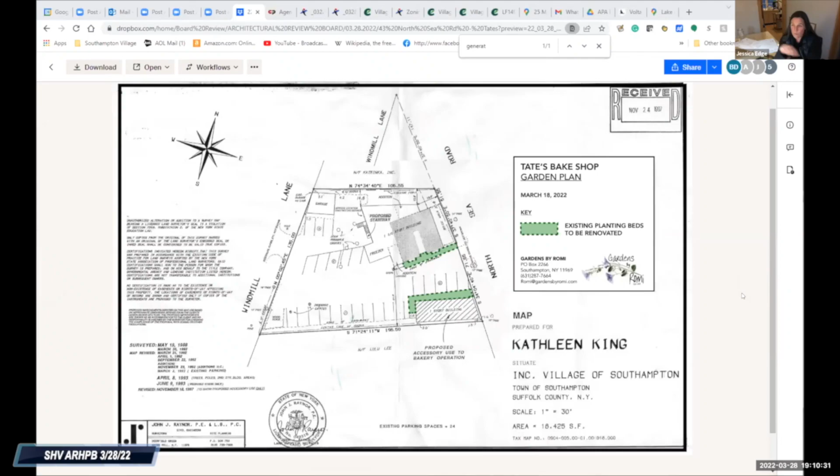So basically, we're not talking about a huge change, we're not changing the configuration of anything. We're using the existing beds that are there. A lot of the plant material is currently overgrown, and really some of it is just too mature for the size of the beds. Those are the 2 beds - pretty much the one that runs along the side of the actual shop, and then on the opposite side of the parking, in front of their storage building.

It's more descriptive in the rest of the presentation, because the plan doesn't show everything. So this is the first bed in front, and there's a lot of existing forsythia, and there's the boxwood. We want to keep the boxwood and the structure of that sort of English garden formality, but we really want to reduce the size of a lot of that plant material and put in more scale-appropriate plant material.

And really create a nice cottage garden. So the next slide will show what we're proposing - keeping the boxwoods, anchoring the corners, getting in some really robust roses, some beautiful climbers on the sign, and then some real cottage perennials that will follow through the season with big blooms like dahlias - a lot more color and interest than what's currently happening there.

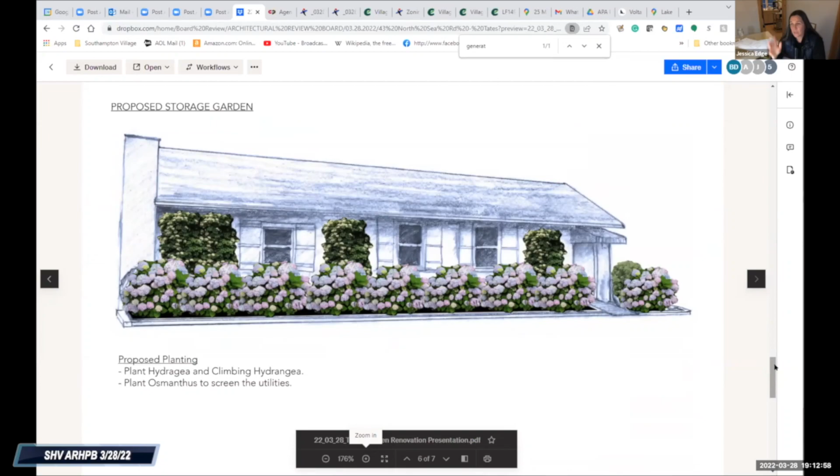What we'd like to do is reuse some of the hydrangeas that are in there, and possibly some of the boxwood - some of them are in good shape, some not so great. But most of it would just come out, and then do a really clean row of hydrangeas, maybe climbing hydrangeas on the building. On the side, we'd do a couple of osmanthus evergreens to screen the utilities on the side of the building.

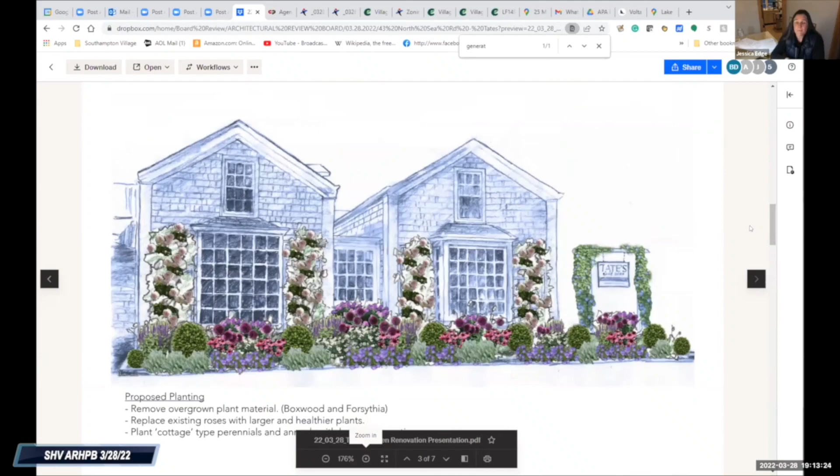And then add some seasonals for interest, and that's kind of it. It's really just to clean it up and create much more of a charming thing than what's there now. That's great, thank you, Jessica.

I'll ask the board members, do you have any comments? Looks beautiful, yep, it's fine to me. All right, Mark, you good? I'm good - we had already approved the front door and the architecture for this, was this additional, or is it all in the same approval? It'll be all part of the same written decision, so the vote tonight would be to close the written decision.

Okay, so unless there's any public comment - Kat, nobody in, no hands up. Okay, I move that we accept, well, that we move this to written decision for Tate's Bake Shop. Second. Okay, all in favor? Aye. Okay, thank you, Jessica.

That was easy. Yep, no problem, we get that all the time.

I move that we accept the applicant's request. A second, please. Second by Sarah, all in favor? Aye. Great, okay, so that's a standing adjournment pending the ZBA approval.

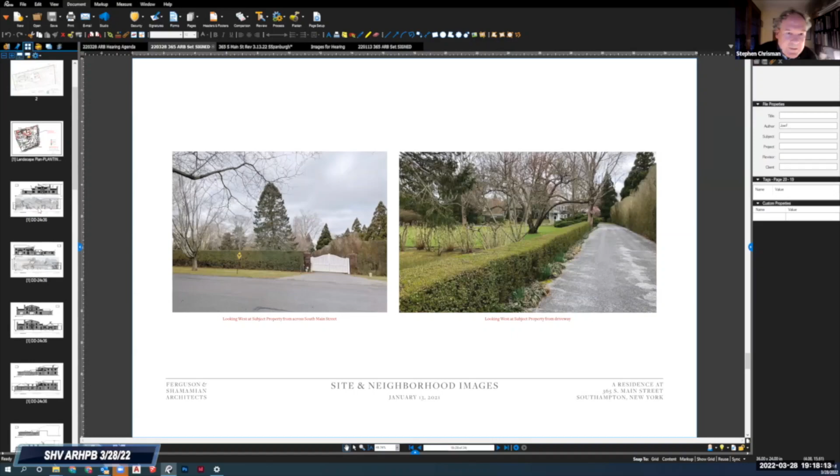Let's start to look at our revised elevations. I'd like to point out the updates that we've made to our drawings following Ms. Spanberg's report. Number one, the roof shingles, we've confirmed that the existing shingles are asphalt, so we'd like to replace those with wood shingles. Two, we've added back a window on the first floor, to the right of the front door, as a subtle asymmetrical architectural character of the existing building. And number three, we've changed the exposed base of the building to be parged masonry, which matches the existing.

And as I noted before, our intent is to bring back the east facade to a more historically correct version of the time period that relates better to the more historical facades on the rear and the sides of the building. We propose to do this in the following manner.

I'll start at the top. We'd like to remove the existing skylight that's over the center front door and replace it with an elliptical eyebrow dormer that alludes to the elliptical eyebrow fan lights on the rear of the building. Two, we'd like to remove two second floor windows near the center to create paired windows rather than more modern ribbon windows, as you can see in our proposed elevation.

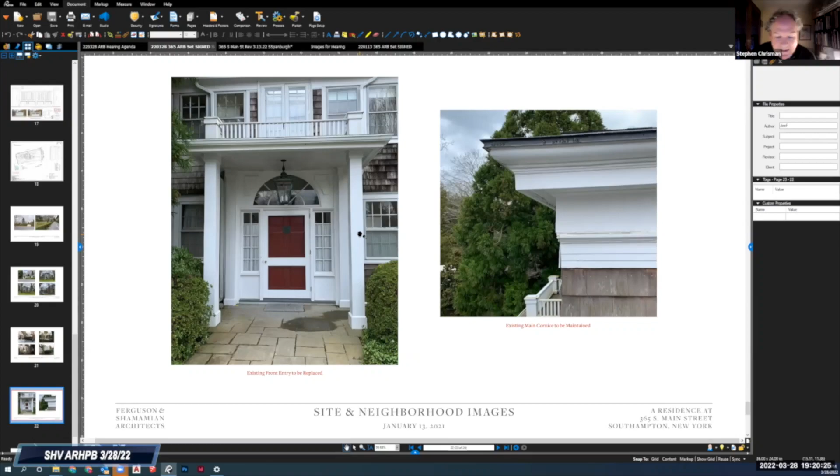Let's look at the photo with more detail of the front porch. So the front porch, in our eyes, the moldings are not historical. Elements such as properly proportioned square columns are absent. The entablature is missing a proper architrave, frieze, and cornice. We compare that to the cornice of the building, which is a very nice Greek Revival type of cornice, a historical element. So let's go back to the rendered elevation.

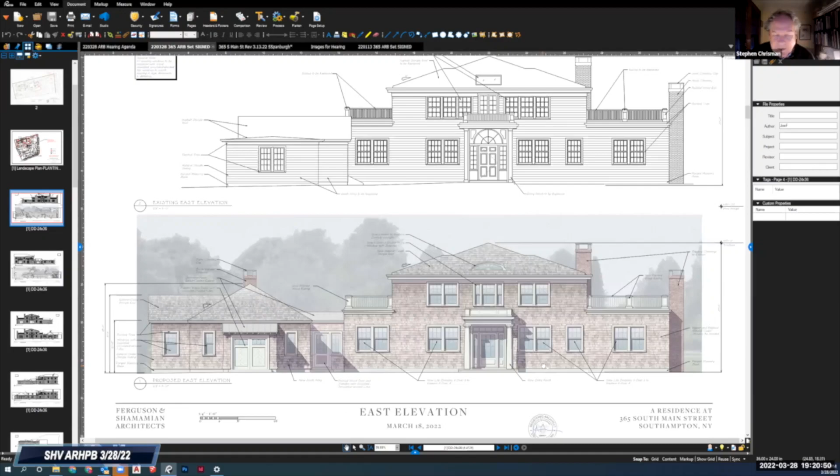Our proposal for the porch is to be a simpler and smaller porch that is correctly proportioned wood Greek Revival columns, similar to other buildings in Southampton, such as the Shinnecock Hills Clubhouse, with a simple and proper entablature.

The proposed front door, side lights, and transom are much more in keeping with historical precedent compared with the more modern existing example, which we estimate was part of construction during the 60s and 70s. Compare that to the upper view with the half-round transom that is larger than the door below, and it clearly feels out of place to our eyes.

Regarding the windows themselves, we are proposing to replace them with new wood windows that are historically matching the sizes and details of the original windows in terms of size, dimensions, and historical proportions. While the second floor windows would be replaced in the same 6/6 configuration, we would like to replace the first floor windows also with a similar 6/6 configuration.

The reason we're doing this is that it results in a much better light proportion, more similar to the windows around the entire building. The current 8/8 windows on the first floor have a very skinny and tall light proportion that seems to be really unique to just this elevation.

Regarding the existing wall shingles, as referenced in Ms. Spanberg's report, we've asked our general contractors from Wright & Co., Jeff Payne and Scott McMahon, to take a look at the existing shingles. Their discoveries show that the shingles are not original and are at least a second generation, and it looks to be probably at the end of their useful life. Our proposal is to replace the wall shingles in kind, noting the same 5.5 to 6 inch exposure.

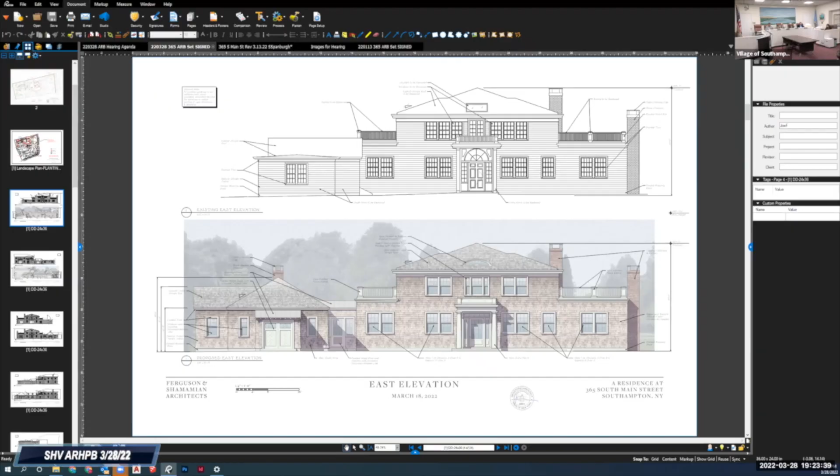One question that I have is the actual height of the pargeted area, and the fact that there was a suggestion to have a combination of parged brick, particularly on the west elevation, which is probably the most intact. And the reason why I raise the question is that if the original use was a carriage house, I just want to make certain that it's not jacked up so high that it doesn't look like an original carriage house.

Right, yeah, thank you, that's a good question. We would be keeping that exact same floor level of the existing building and the same exposure that's currently there in the parge. We would be maintaining that with our new foundation, so I think from the exterior there shouldn't actually be any visual changes from what is currently there on all of the elevations. Thank you.

Thanks very much. John? Okay, Peter? That's great, okay. Mark?

I'm good, looks good. My only other question is echoing Sally's question, which is, is it going to still be gutted? Are any sections worthy of adapting, in terms of the interiors?

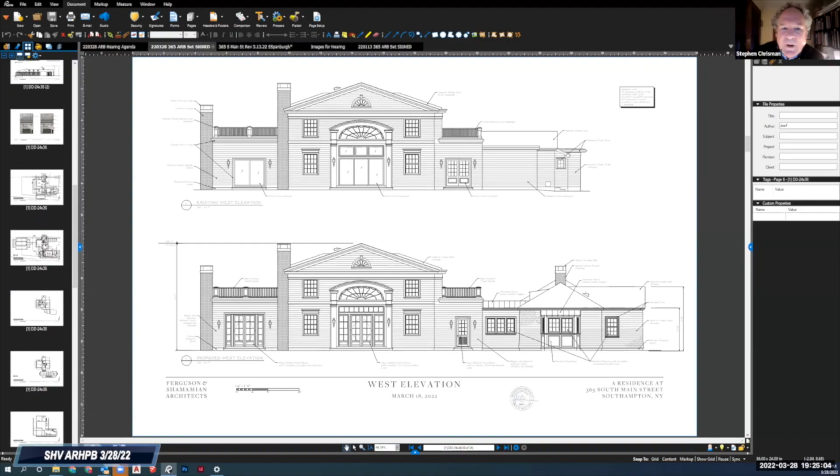Yeah, and that's just a question because it was raised by our historic consultant -- why is it necessary to gut totally? Yeah, we are renovating the interior. The large great room is going to be in a very similar configuration to what it is today. But we also understand that the ARB might not have comments on the interior, so we're just--

It's not so much that we don't have purview, you're right, but comments are fine. Take it as a comment.

For instance, there's a barn we're looking at in another location, and part of the drafting was to, as much as possible, keep the interior. We don't have purview to approve or disapprove on that basis. On the other hand, to the extent that we as a board charged with historic preservation can suggest, we at least bring it to your attention. I think that in both of these instances, with a 19th century barn and the rapid attrition rate of outbuildings on historic sites such as carriage houses, it's a point we raise from a 'oh golly, before it's gone' standpoint. Thank you.

Yeah, no, we appreciate that.

Our understanding is that it's been converted into a house some time ago, as late as the 50s, between 1938 and 1950. So it hasn't been a carriage house for a long time, but we do hope to preserve architectural character. There's a lot of nice beadboard in the interior that we would like to maintain, or replace in kind, so that the architectural character could be very similar to what's there today.

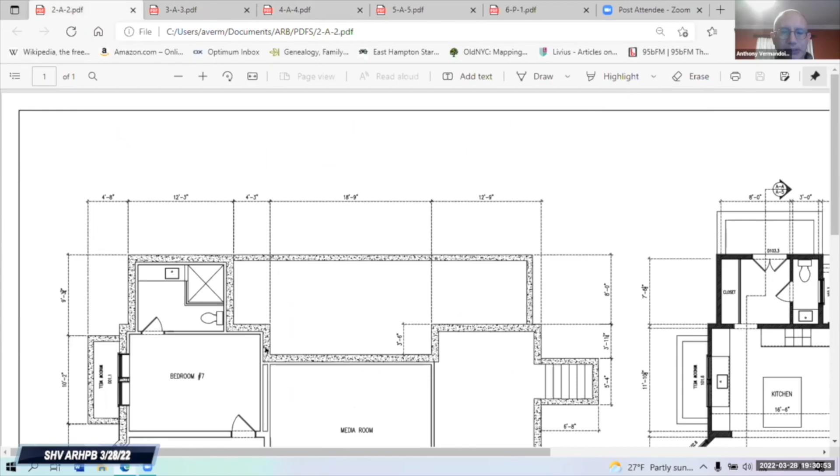And I think at the last meeting there was a question of what the floor plan would be behind this wall, so just to kind of show you what our thoughts are right now with that. Let's see here, where am I? Okay, you should now be seeing the first floor plan.

I think it's the first floor: storage, mechanical, great room, sitting room. Yeah, I'm having a little trouble with my cursor here moving this over, so let's see if I can get this a little bit better here, see if I can move you guys out of the way. There we go, okay, so you can see here, here's the enclosed porch.

What we're doing behind it is the bedroom will basically keep some existing windows here which are going to stay, so this will just be like the original outside wall. Then opening this up in the middle here, where there's currently that big bay window, this will become the new entrance hall. Front door, staircase is still in its existing location. What we do want to do is just try to keep that definition of the original front wall of the house running across here, even though it's being subsumed into the heated space of the structure.

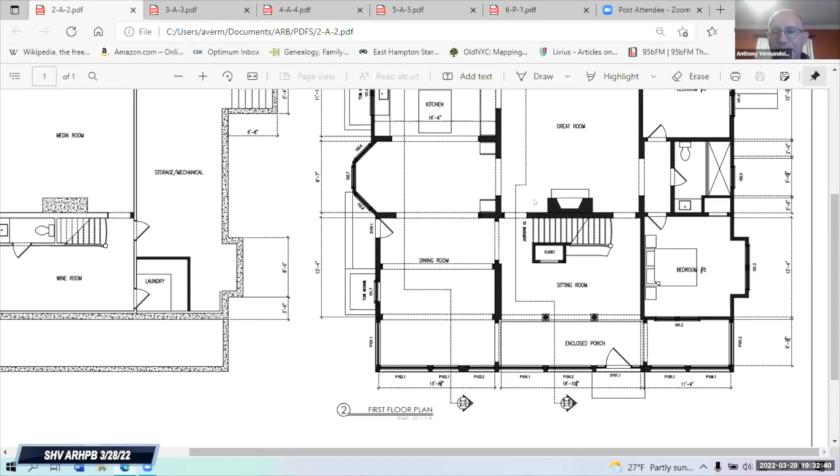And then this space here becomes a dining room. We're going to need for structure here a dropped header across that, which will be dressed up as like a decorative beam, to make a sort of coffering system. But that's basically it, that's basically how we're planning on incorporating the porch into the heated space of the house.

And I'm going to go back to the elevation. Sorry, I'm having a little trouble with my cursor for some reason. Here's the side elevation, once again showing that porch enclosed. And then I think one other comment was to keep the existing side entrance and the existing overhang, so we're going to keep that and just replace the door itself, which is not original.

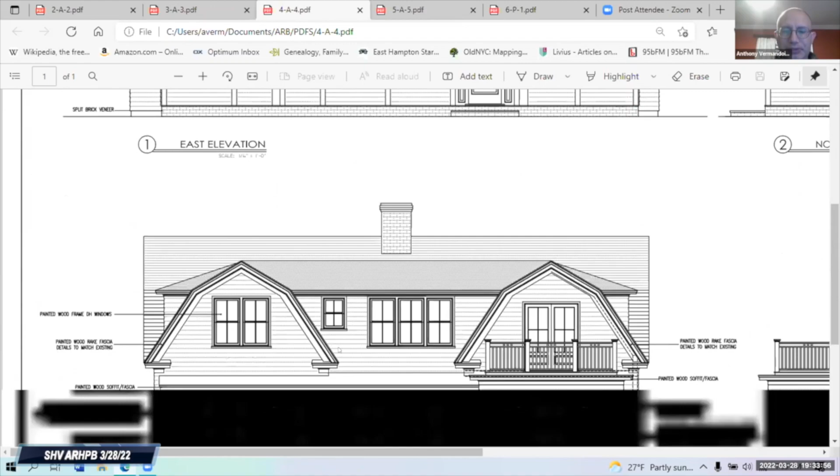Okay, can you show us the west elevation? The rear elevation, in other words. Yes, so that's the rear elevation. Okay.

Thank you. I have a question on the porch itself. Is your intent to remove an existing wall from the original structure? To partially remove it, yes. And it could not be reversed. I think that flies in the face of our typical standard for historic renovation, that you're essentially altering the original structure, the exterior wall, in a way that could not be reversed. And for me, that's an issue.

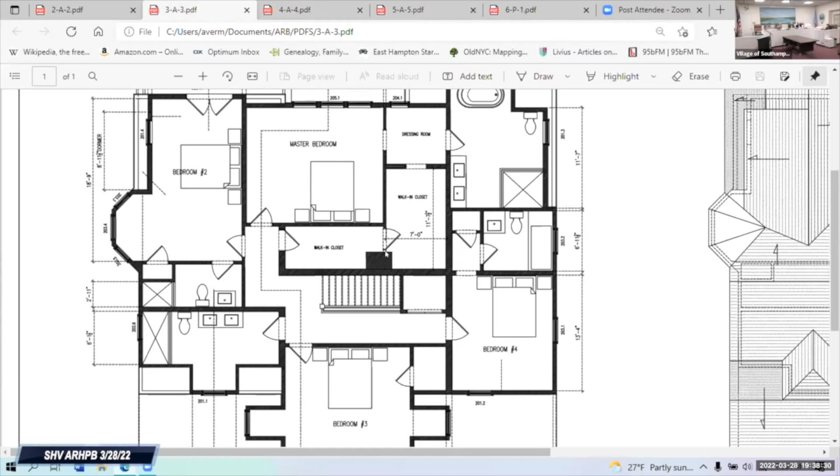So on the northern end of the porch, you're going to keep the paired windows and the inner wall, former exterior wall, intact. On the southern end, I think I'd agree with Sarah and John that we keep that wall, but remove the door and side lights and just make a large opening. In the middle, I don't have a problem with those columns.

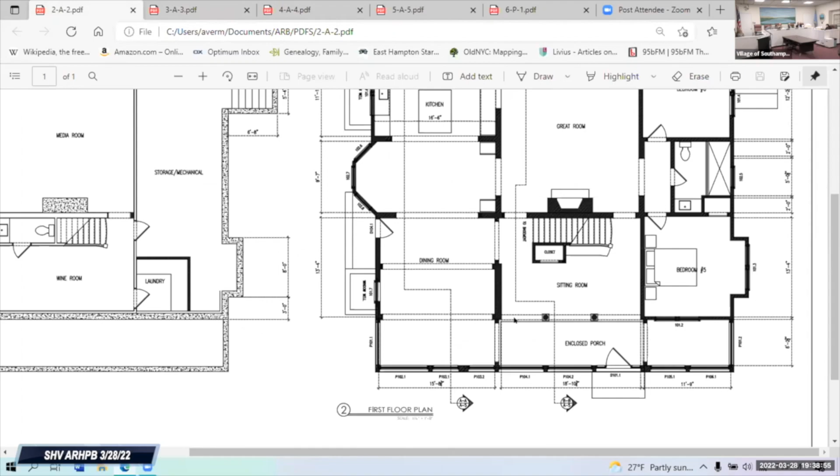Do you really need them though? Again, perhaps an interior matter I shouldn't comment on, but it just chops the room in half. Can't help putting my architect brain to work, but perhaps that's not germane.

The only other comment I have is that you seem to have changed the proportion of the lights on the porch. There were essentially 4 lights per unit, and I know why you did it, you made it 6 lights per unit. I know why you did it, because one of the existing storm windows is actually a light and a half.

I love that sort of accidental happenstance. To me, it shows what happened in 1915, it didn't quite work out, but they found a way. I like that bit of authenticity, and would encourage you to go back to the proportion of the lights that you originally had, that are there now, rather.

The other thing is the second floor windows in the gambrel. They're flanked not by straight courses of shingle, but by an up and down shingle pattern. I know it's very subtle, but it does kind of reinforce that horizontal, proto-modern thing that just kind of happened.

It makes that more of a band and less of punch windows in a full wall - that up and down coursing. You know what I'm talking about? Yes, the intent is to keep that, or replicate it. It's a little hard to express in a 2D drawing, but I understand, of course.

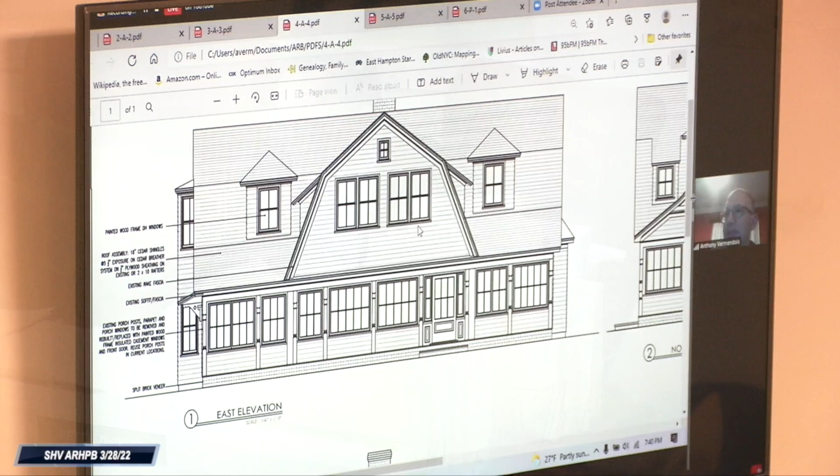But it should be called out so that as a record. All right, we can add a label about that, sure. Yeah, okay, and that's what I have to say.

Mark? Make sure. Good, I'm not muted. I think from the outside, it looks good.

I think I share the concern that right now, when you look through those glass panels, what you see is a porch. What I'm understanding is when I looked at those glass panels, that porch is no longer a porch, except on the right-hand two sets of windows in front of the bedroom, where there will be a wall behind it. So it's defined as a porch, whereas the rest of the front house is entirely defined as house. So I've lost the dimensionality of the original wall.

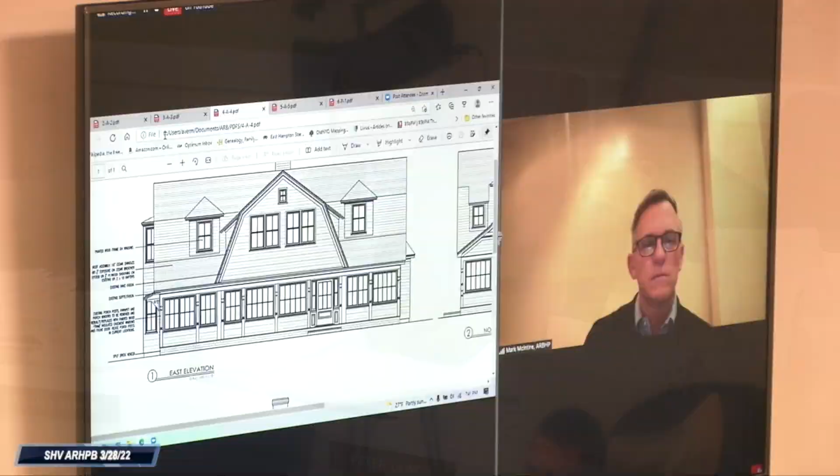From a historical standpoint, does the interior wall that makes it a porch have to remain solid, or could they put in, let's say, French doors? It could be an opening, sure. It can be an opening, but considering the age and the agreed upon date, you keep the opening, and the actual wall on either side of it on the west. Right, so that could be converted.

That could be open as far as glazing patterns, or just open, but it's an opening. On the south side, that wall can have a door or pocket door internally, or must it remain solid from a historic standpoint? No, I think there's an existing opening there that's got some non-historic side light and door. So I suggested that they just remove that door and side lights and maintain the opening.

So the original opening is appreciated, documented, and that, fifty years, ten years hence, when somebody says, oh my God, what were they thinking, and they find a drawing of what that looks like, it can be reversed. And I think that's a good compromise with the center open - I think it makes sense.

But I do think that we should be given the opportunity to really chew more on these since I didn't have access to this. This wasn't in my packet. Was it in your packet?

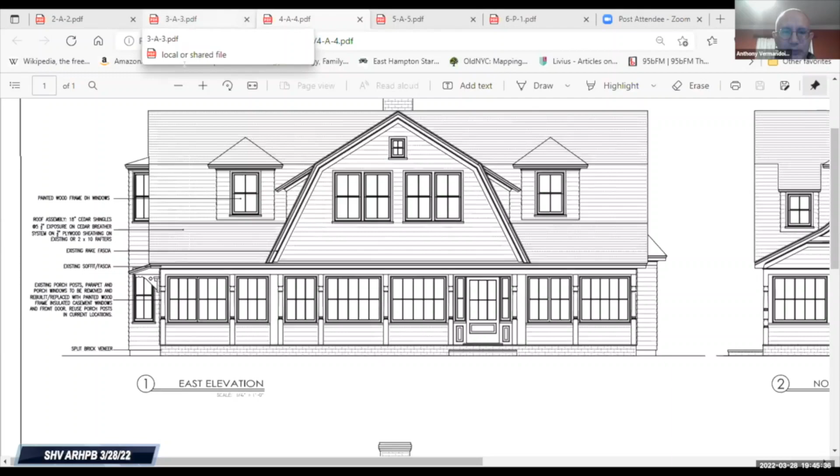I think the other thing I just want to look at here is this floor plan. I just want to understand what the board is having some issues with, specifically this opening here. Yes, yeah, all right.

Okay, so if I'm just going to measure this exactly from my as-built drawings, if you were to measure that existing non-original door that's there now, that is 6 feet wide. So if you just literally removed that door and made it into a cased opening, there would be a 6-foot opening here. So our only thing we were proposing was to make that opening a bit wider. But we certainly wouldn't want to go less than 6 feet wide here. And there's really not any way of telling what was there originally, if it was a window or a door or something that got replaced over time. So whatever was there no longer exists.

Then for here, whether or not we have these columns, it was just more of an interior design idea. Didn't really think that was something that was going to come up for the exterior for the ARB. But we could probably make this just an opening rather than having the columns, if that's an issue.

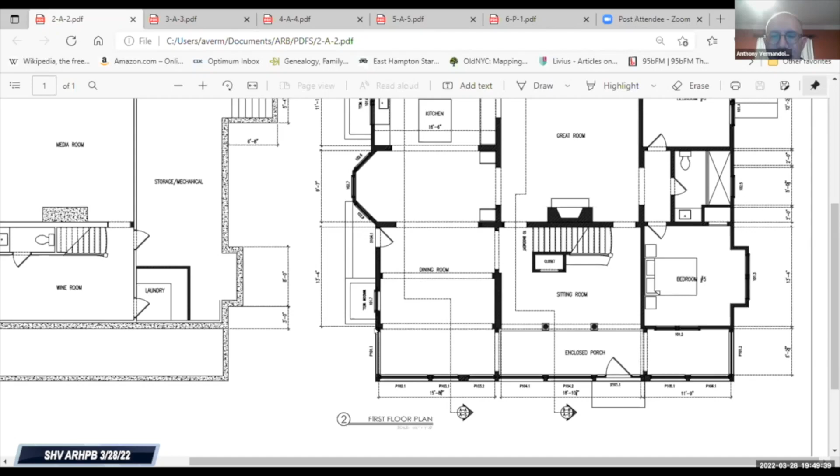Well, one thing I want to say is just to put this in perspective. You recall that when we first presented this project to the board, we had originally proposed to just keep the bay and open the porch up completely, removing the storm panels. I think the board, maybe we misunderstood, but I thought we were going in a different direction, where the compromise being that the board preferred to see this enclosed porch rather than a porch open to the air, but we would at least be able to make it more useful as a space, because right now the porch as it is, it's just not really a usable space.

I agree with you, Anthony. That's your picture, Peters. Okay, and this picture of what exists, I just wanted to make clear the fenestration, the light proportions of the windows, and how we very much want to preserve that, even though there are occasions where half the light gets chopped off.

Any other comments? There's no hands up in the public. Well, I'd like to ask a few questions. Yeah, you can. Okay, hi everybody, I'm the homeowner.

So on the right-hand side of the porch, where we were essentially keeping the existing wall between that bedroom and the porch, it sounds like we're okay. Sounds like it's the dining room side of the porch where there's some concern, and as Anthony mentioned, there's a door there. You've also required us to keep the side door from the driveway, which really is not a functional door, because I really don't intend on taking out garbage or having people walk in the side of the house from the driveway.

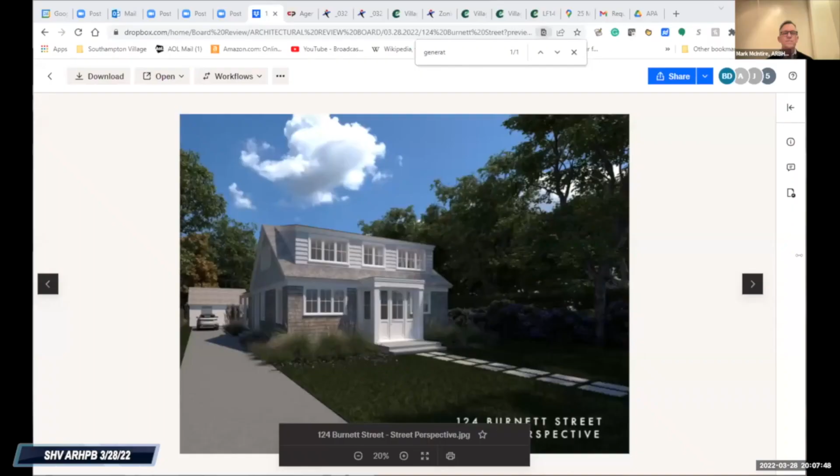Okay, ready to go, Kat? Yeah. Okay, all right, Eric. So I believe it was the second time I came back, I showed the same way. Alex, do you have the rear?

Yes, that's what we're all looking at. Thank you. Thanks, Kat.

So the width of the deck, as I showed previously, is the same, and last time I had shown it out to the metal roof. We talked about either a 5 foot or 7 foot deck, so it's been reduced to a 6 foot, about the center of the rail, so the door can open and move without dropping around too much. That's really the extent of this presentation. It was reflected in a number of drawings, so that's why I showed it, the full set.

Looking at the two pictures, perhaps not surprisingly, the smaller scale deck looks better. It's more in scale with the house. So I think in this case, not only is the issue of privacy addressed, but also in terms of design, I think it's a better look.

Yeah, a good design, thank you. It really is. It's so nice to see something there, not overblown. This was definitely a small case.

Any public comment, Kat? Give me one second. Okay, there are no hands up in the public.

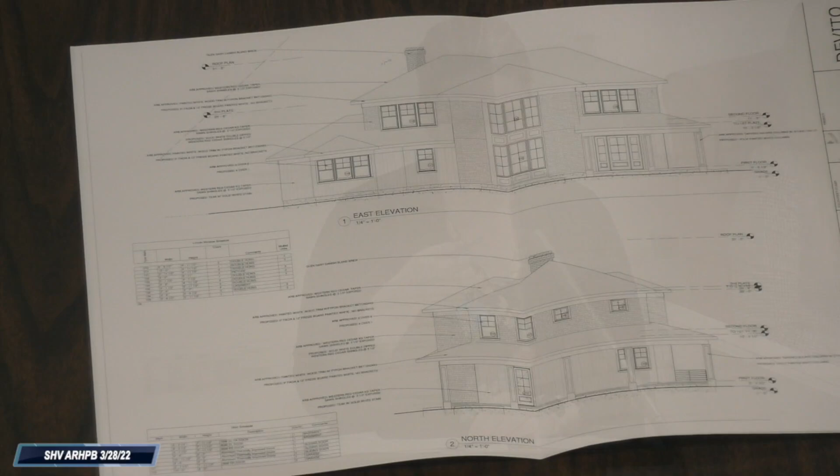Well, like I said, Denise, it's not so much the changes that we make, although I realize it's presented as an amendment. Looking at this as a tabula rasa, would we approve this design as is, and that includes the verticality of the siding versus the shingle, and the windows in terms of type and design. So we're looking at it almost from scratch. So you can take us through the elevations, tell us what the concept is, and then we'll open it for board discussion.

Jeff, we have the style of the house. We have the white cedar shingles on the front area and the upper area. We have a vertical stain siding, the same color as the white shingles on the main part of the house. I'm proposing a 4/1 because the architecture of the house, I think, looks for a bigger light pattern. And I understand the concept with the prairie style, but my feeling is looking at this, the right window is a larger light pattern. So I think the 4/1 is the correct pattern. I tried a 2/1 and a 2/2, it didn't work, and a 6/1 is just, they're too small, it's too busy. I think this is the proper style for the house.

We addressed the columns, we dressed everything pretty much with it, so the fireplace location went in as it had to be. It was a mistake on the earlier plan, but the fireplace chimney is where it is. We want the Danish blend, which is a more natural Long Island colored brick. And the entry door, we have the 6 light over 1 panel with the 2 side lights that just have horizontal, so that's 3 lights. Try to get everything to tie together nice, make it a simple, good looking house.

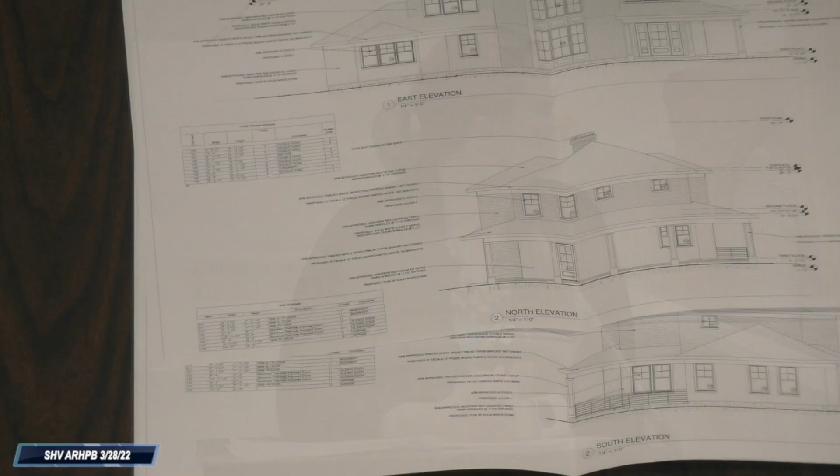Board members, do you want to see the other elevations or no? Okay, no. All right, so let me open it for board discussion.

I'm in agreement that the 4/1 is the solution to the windows. The 6/6 would have been peculiar. And you are removing the prairie style windows and coming up with a solution that I think is a good solution. And similarly, the door seems to be, with the divisions, it seems to reflect the 4/1 as well. Yeah, I like the window pattern. I like the stained wood. I think it's fine. I also think the stained wood is a risk.

The window framing, that's all white? Yes. Okay. Is that specified right on it? I think it says on the window schedule, it says the Lincoln made-to-order white windows. Where is that? The window schedule.

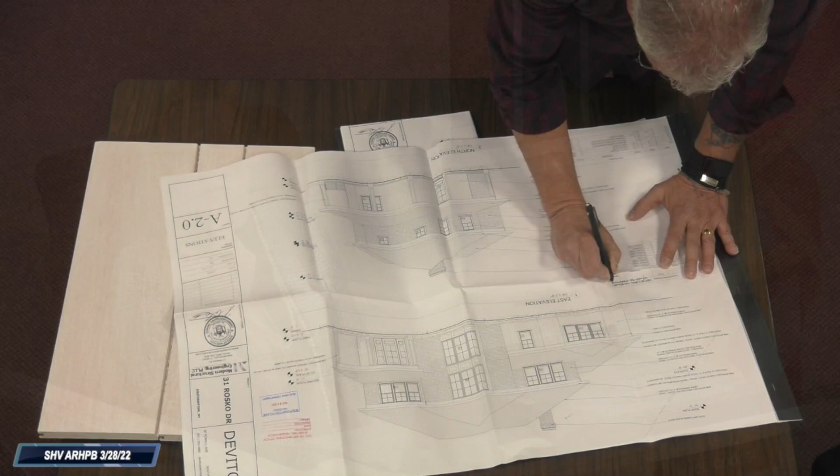Right on the front page where it says Lincoln window schedule, I'm gonna put, Lincoln windows with white framing. Yeah, okay. They have to repeat that. Yeah, so whenever the windows are specified, so is that simple, is that just a repeat? 2.0? And I think 2.1 as well. So, yeah, wherever that is, write typical, then you're done. Write typical, you're done. Okay. Immaculate? Yeah, yes, okay, all inclusive.

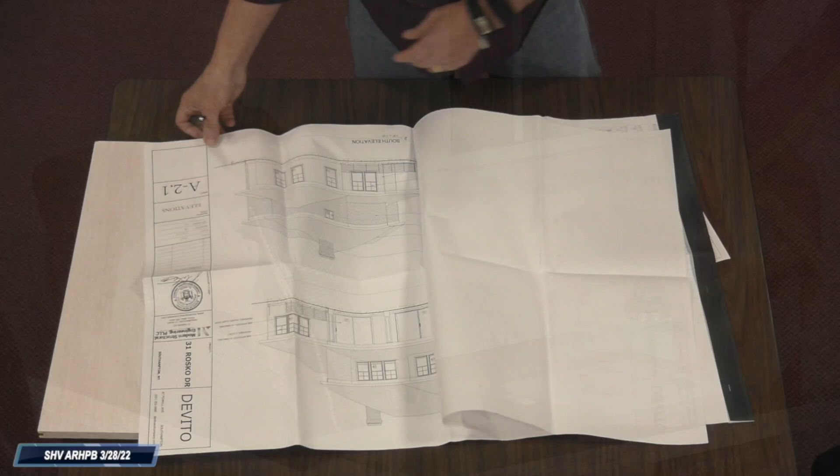Mark, any comment from you? No. Okay. I'm gonna mark the garage door as white also, because we have no color on it. Okay, thank you.

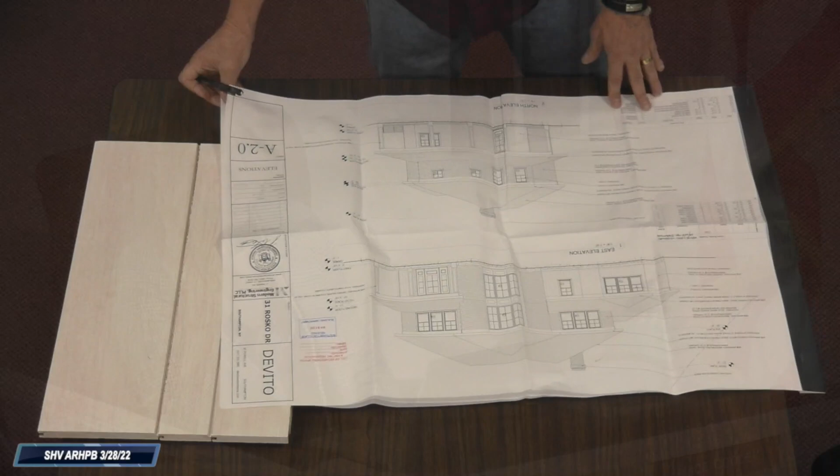Find the couple pages where you made your notes. That would be good. And the door, does that also? The door, why does it say so? The front door, you mean? The front entry door is also gonna be white. Okay, you should probably just, since there's a door schedule. Sure, it's front door. Yeah.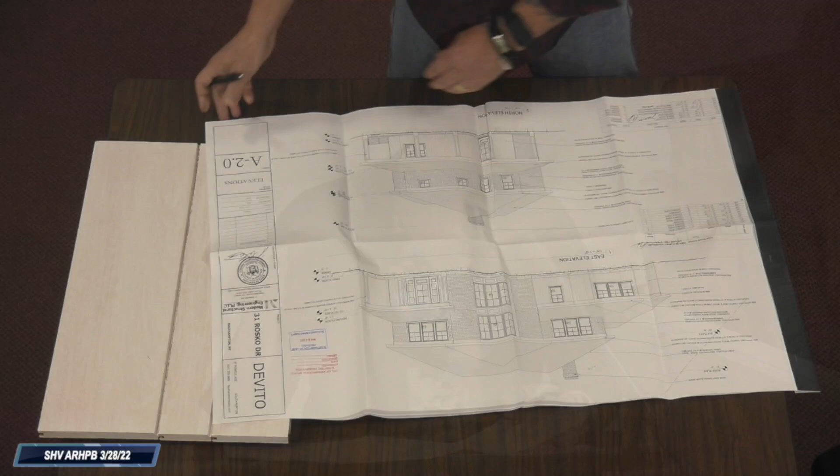Okay. Any, while you're doing that, you may ask Kat, is there any public comment? No, sir. Okay, great. Anything in this, Alice?

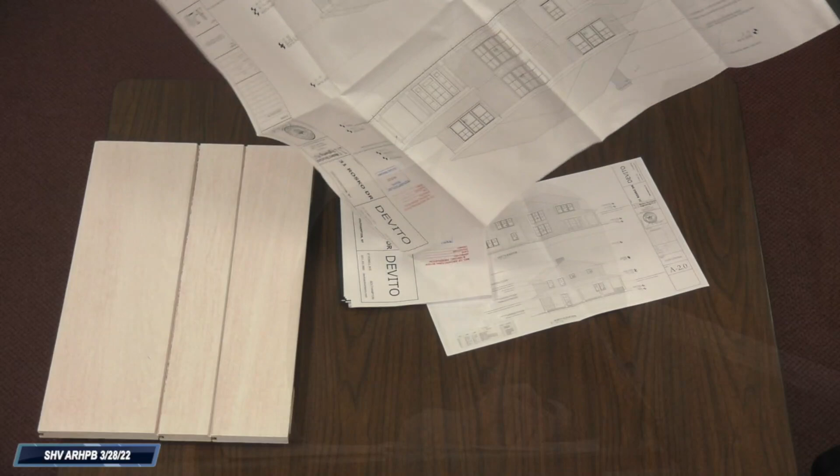Good. Okay, so I'm gonna move that we accept the application as submitted. And what's the date of that, those plans? 3/24. Okay. So, I move that we accept the application and plans as dated 3/24 and changed this evening, noted this evening for 31 Rosko Developer LLC, at 31 Rosko Drive. Second on that, second by Peter. All in favor? Aye. Thank you.

Frank, needless to say, but I will say it, please, let's not do this again. What they do, the happening house is done with the changes, but there's a lot of unnecessary, as they say in the vernacular, service. So they don't need to have, send it there. So, yeah.

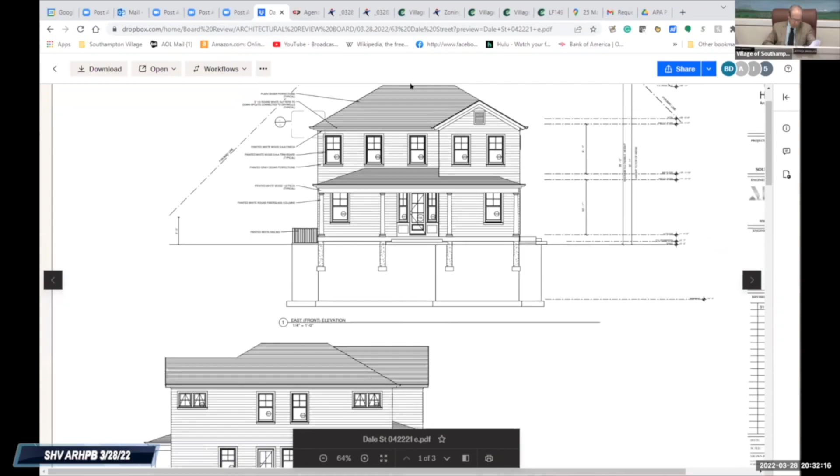Okay, let's see. Peter, you're the roof maven. Yes, I think it looks very good. Yeah, thank you. You know, it's a nice looking little house. Greatly improved, and thank you for following suggestions. Okay, yeah, it's fine. Okay, any public comment?

All right, if not, nope. Good, then. I have a question. Sure, go ahead.

What's the width of the front door? It's 3 foot. Okay, thank you. Is it 9 feet? Or is it an 8-foot door? No, it's an 8-foot door by 3 foot wide. Okay, thank you.

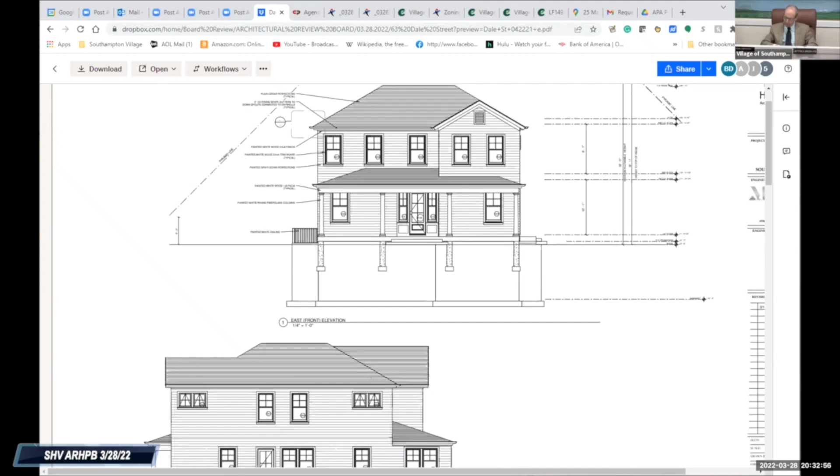So then I would move that we accept the application and plans submitted, dated March 25th. Second. So, Margaret, looking at 63 Dale Street. We have a second, obviously, from John. So all in favor? Aye. Okay, aye.

Thank you, James. Okay, thank you very much. You're welcome. Okay.

So, SKV Wickapogue Road LLC, Wickapogue. And we have Sue, so again, just introduce yourself, Sue. Hi, my name is Yu Liu. I'm the architect for 508 Wickapogue.

The board made a suggestion to me with regard to the northeast elevation and southwest elevation. The northeast is where the garage is, and last time Peter made suggestion to lower the front portion of the roof to line up with the back. I think I took your comments about lowering the roof too literally, but once this lines up, it's very easy to wrap it around. So that one is fixed. And then the other side.

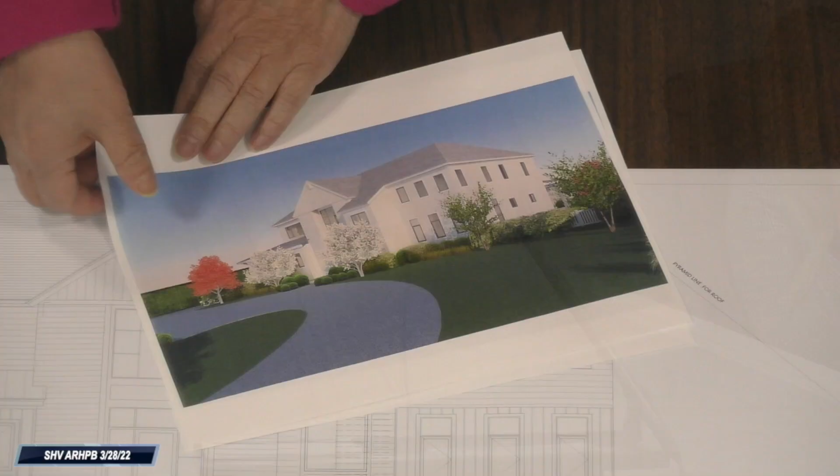Well, actually, we got the ARB approval. All we have to do is go to the, put in for the permit, and it should be approved within a week. And we won't have any problems building what you want to build.

Mark, are you able to hear? I think I may have lost audio. No, I think the audio disappeared. Kat, if you can hear us, I think we've lost the audio feed. Jack says they're trying to figure it out. Okay. Not scary, is it? Yeah. Can anybody hear me now? No. Now we hear you. Thank you. Okay. Oh, good. Yeah, now you're back. Never mind. I didn't know what.

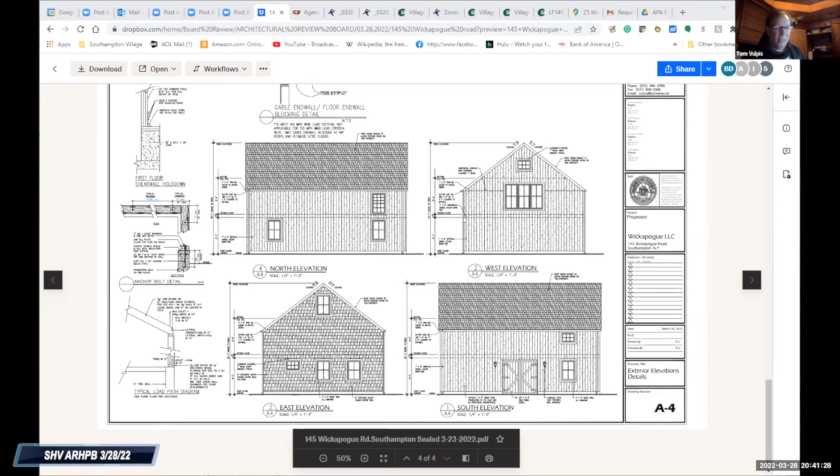The east elevation, the original building had cedar shake shingles, so we put the cedar shakes on that whole side of the building. On the first story, we have a 3-window unit from left to right, and then we have a double hung window, and then we put a gable window on the upper side.

Moving on to the north elevation. On the first story, we have a double hung window, one on the left and then one on the right. They mimic each other. And then we have a 9/6 window above that. Again, from the historical pictures, we believe that that's original to the barn. And then on the western elevation, we have a triple window on the second floor with a 6-light awning above that.

We also modified the interior to replicate the last request on the document that was given to me. And we now have the open bay in the middle, and the left and right wings are floors at the second level.

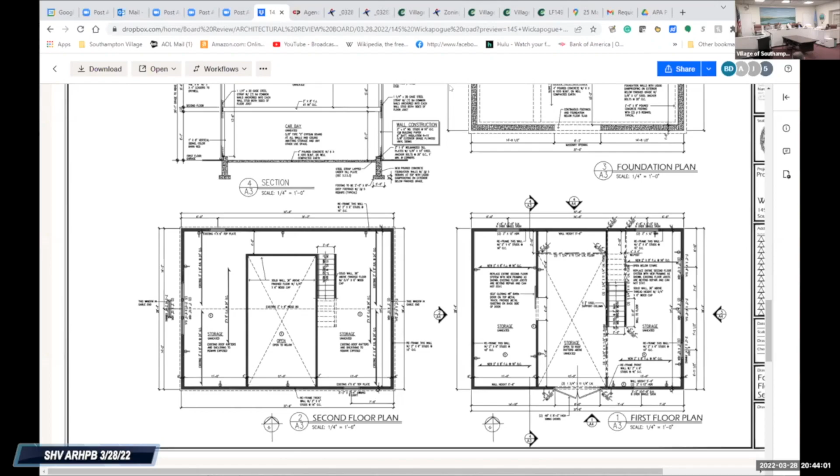It appears that when it comes to the exterior materials, painted barn red, and the fenestration patterns that were called out, you appear to have met the requirements indicated by our historic preservation consultant. The only thing I'd take issue with are the carriage style lights you've added.

They look too much like a 1920s colonial revival light, and I'd suggest something rather than ye olde style, like a gooseneck. A gooseneck would be far superior, and more barn-like. We will put whatever light you want on there. I think it would be more in keeping with the vernacular style building than the old carriage light.

That's a really good point. To be honest, where I have those lights, I'd probably like to do one gooseneck above the barn, above the door, so that when the doors open we don't destroy the lights. That's better, much better anyway. Yeah, it looks really nice.

I'm sorry the previous hands destroyed things, but I think you've done a rather good job reconstructing. Now on the gooseneck, not to get too technical, when I think of a gooseneck on a barn it's that sort of green outside with white underneath, as opposed to brass or chrome. Any color paint is fine with me, but nothing fancy, nothing shiny.

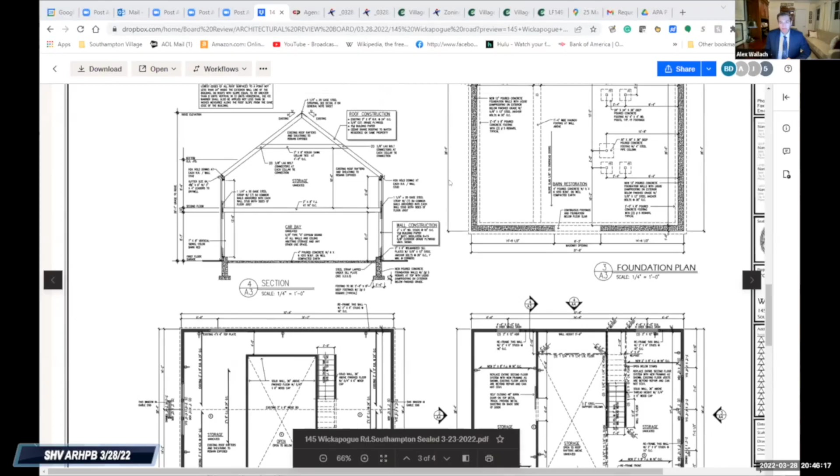Can we do that? Yeah, and then I'll make sure when I sign the plans tomorrow I'll notate that. Maybe you can send a memo to that extent. Well, I'll put it in the plan. When you make the motion tonight you can just say it, and it'll be in the minutes as well.

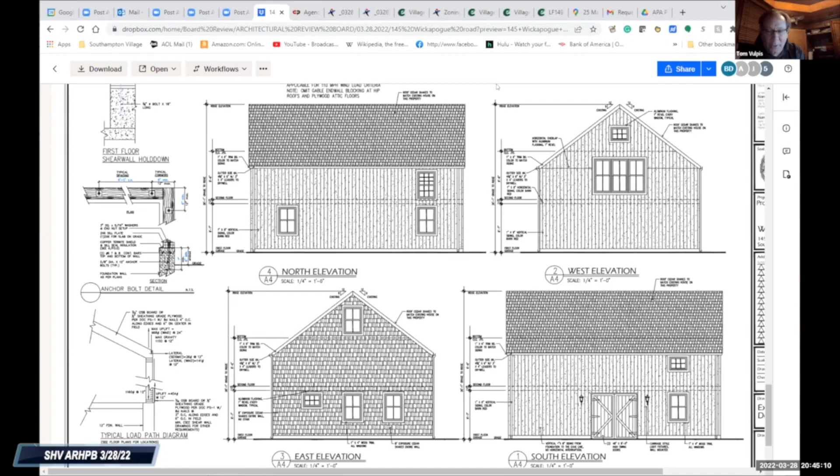I have a question, Sarah. When you look at the shingle exposure on the north elevation, does 8 inches seem proper to you? On the east elevation, where there's this natural shingle wall, that doesn't bother me, but if you want to run it by Sally, just to double-check that 8 inches was the original.

Now you guys are adding one dimension that might preclude us from approving this evening. Well, which is okay. What do you think, Alice? Approve it. Mark, if you could look at page 5 of the report given to us, you'll see the shingles there. Yeah, it looks to be about 8 inches. I'm counting courses on your window against the pictures.

They do seem to be very large. I was looking to see if Sally actually called it out on her report. I was pleased actually looking at it that they weren't mingy, so eight seemed pretty good to me.

What were you talking about, the vertical? Yeah, the coursing of the shingles. Oh okay, yeah, I think 8 inches is fine. You do see that in old houses, a bigger reveal, and I think the reveal is good because it's less refined than a-- yeah, I understand it, but they look bigger than normal. Frankly I was making sure they're big enough. All right, okay, so we're good then.

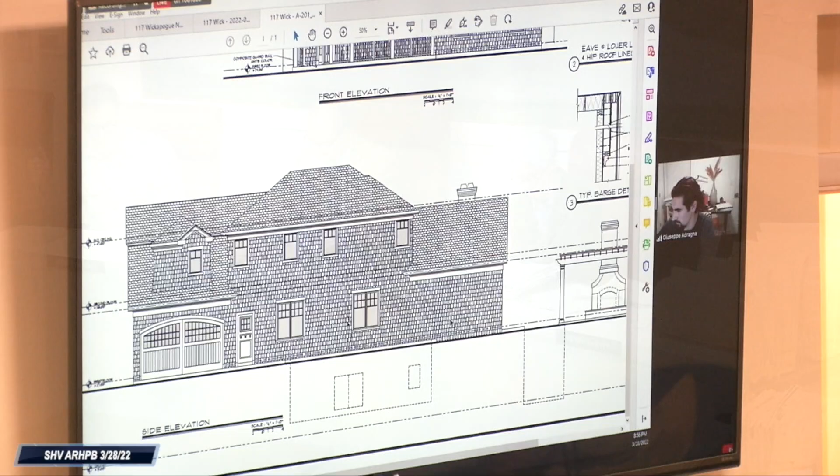That was a comment from the first hearing, and I did beef up the fenestration, but this part all the way down at the end is the master suite, and we really have our light coming in from the rear yard. They're looking for a little more darkness. So after you discount this, I think the fenestration and siding is pretty close to where it needs to be. So I did address it the first time, which wasn't discussed last week, but it is something that I was aware of, and I think it's feeling better.

Thank you. Oh, thank you. All right, Peter and Sarah.

Well, I guess I'd like to see the roofs, the eaves line up a little more. The dormer perpendicular to the gambrel, facing west, is a little lower. And also, I think I failed to mention this, the dormer on the east side of that front-facing gambrel, that's very odd looking with the off-center window with the gable over it. Maybe if you didn't have the gable, it wouldn't emphasize it so much.

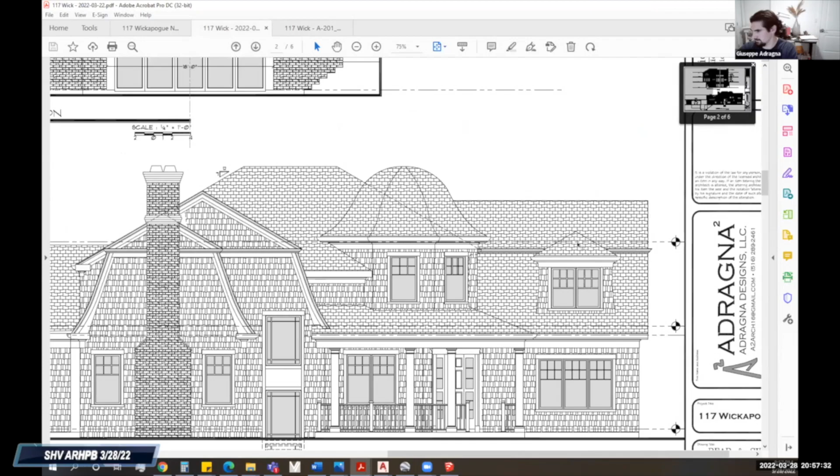Frank, that would be on the side elevation and this one here? Here, it's on the side elevation facing east. Okay, so, oops, I was looking for that. What is this one, so the one above the garage doors? Yes, exactly. Okay, what was your comment about that?

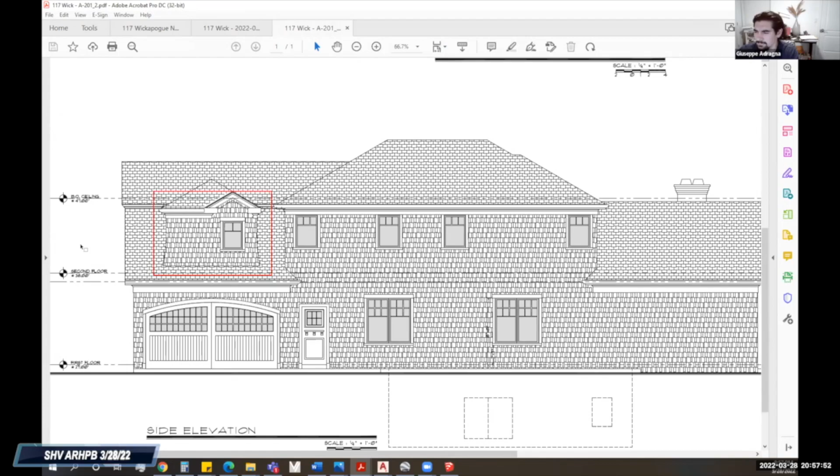Well, it's, I know you said that the eaves don't line up, which was on purpose. I think it was going for a little too much alignment, and it would make it appear a little too tall if I had brought it up that extra 6 to 8 inches. But just, I guess maybe what, the lopsidedness? I see that point, making it lower, yeah.

I guess that dormer is sort of bothering me. I mean, can you have another window and lose the little inset gable? Yeah, yeah, we could make it a hip dormer like the other side. Regular - I think I'd make it more regular.

And what do we think about the tower? The tower. I don't know, in terms of its eave line and how it pops up again. Well, we spoke last week about perhaps straightening it rather than being bell-shaped. Right, we did.

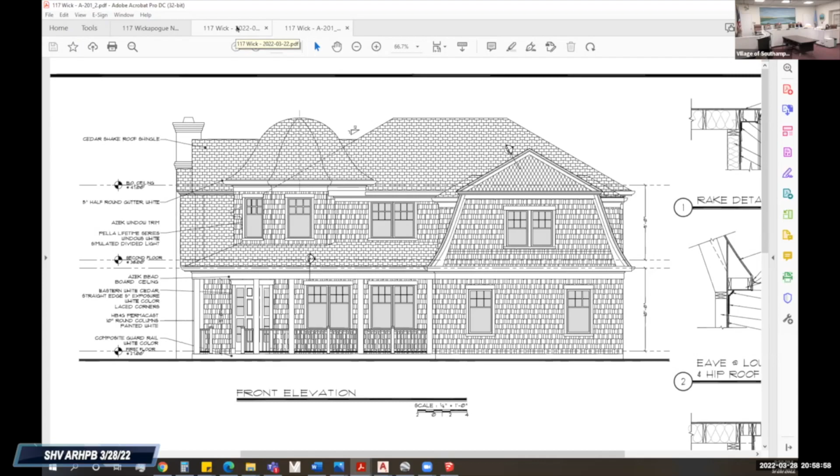And Giuseppe said he would run it by his client, but his client wasn't necessarily disposed to do that. I don't know how it would look simpler, I think. It would look simpler, but it was a non-budge point from my client's end. He feels he did budge enough when he went from metal to shingle, and this is still something that he and both my client, the husband and wife, really do want to see on their house.

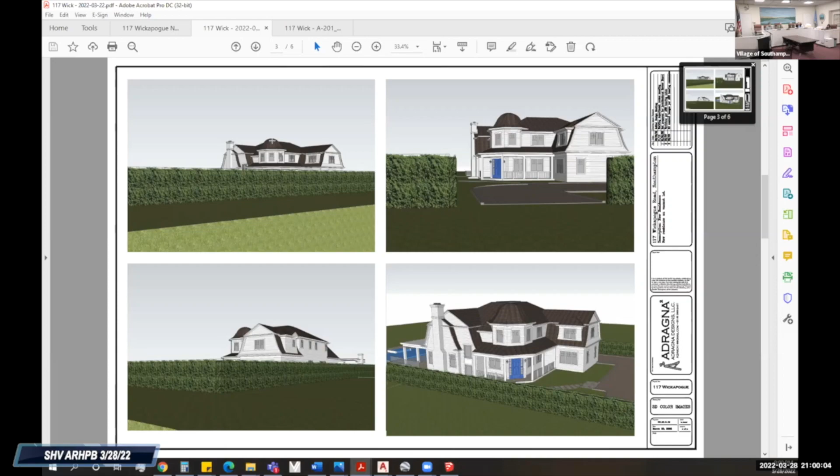I appreciate that. At the same time, your original premise was to create something that was agrarian, had elements of being agrarian, and a bell-shaped turret does not. So I don't know if it's the hill that the board wants to die on. It's not my favorite element, but I think in the scheme of things, since he's shown it in context with other buildings on Wickapogue, given its massing, I think it's relatively minor.

Yeah, I'm with you on that. I think when you look at the streetscape, that puts things into a different perspective. And that's why this exercise has all been useful.

I agree. So I guess to me, it's that odd looking dormer facing east over the garage. If it could just be like the one on the other side, I think it would be better. And it 100% can be just like the one on the other side. I think it blends in and disguises into the shingle roof.

Great, okay, yeah, because that's both in the elevation and in your schematic, it sticks out, so that's great. Let me ask for public comment.

Any comment, Kat? No, sir. All right.

So Giuseppe, it's significant enough that I would like to ask you to come back with that revised elevation. Do you agree, Alice and board members? Yeah, okay. I mean, it's a side elevation, and we already have the reference of what it needs to look like as the dormer on the front side of that garage. I definitely would argue that it's not significant enough to be the only reason to return next hearing.

I appreciate your argument, but at the end we do have to have the plans reflect what we approve. If it's a light like we did in the last application, that's one thing. If it's a structural element, then we do need to see it. So again, I appreciate your position, but ours remains as it is.

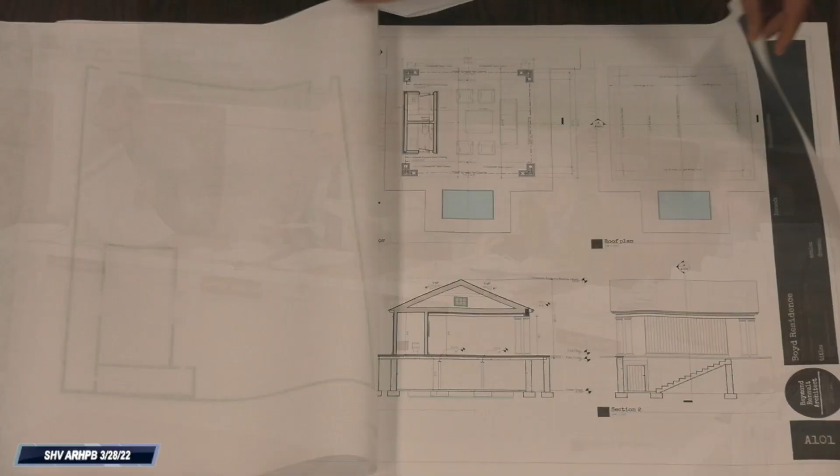So that's adjourned. Okay, Stephen Boyd at 104 Foster Crossing, to construct a pool cabana. Thank you, Alice. We received the affidavits and they are in order, so we can take jurisdiction. Okay, great, so tell us who you are and who you represent and where you hail from. I am Raymond Reynolds, architect. I represent the client, Stephen Boyd. I reside at 44 South Atlantic Road, Shelter Island, New York. Okay.

Probably bringing these up digitally if you have them. Well, actually, if you're putting them on the table, Kat can zoom in. So what we're presenting today is an application for a new pool cabana, which is in the rear yard of the property, adjacent to a new pool. It's a very simple cabana structure that's very open to maintain use of the yard. It has a very low pitch, kind of slung roof with some gable end windows and some shutters and color schemes that will match the existing residence.

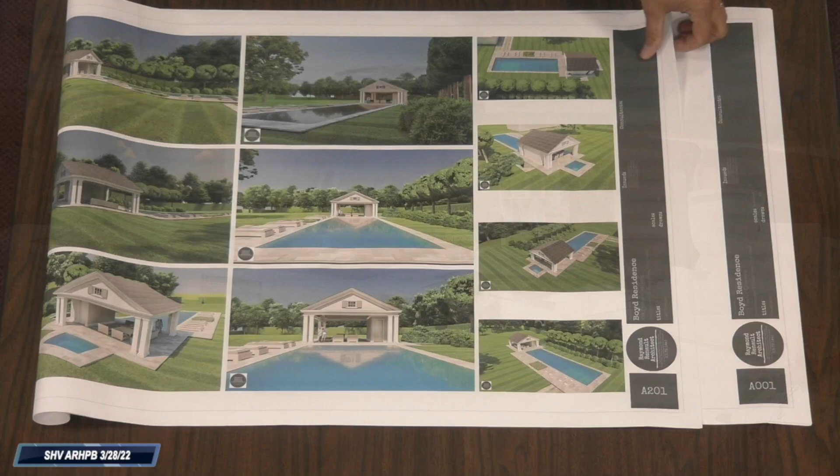Okay, for the benefit of the board and the public, and also because I would need magnifying glasses to read the materials, can you just quickly tell us what the materials are and the colors? Sure. Yeah, we're actually going with cedar shingles to match the existing residence, and we'll also be using vertical cedar siding that will be stained white to match elements of the existing residence. The residence has some cedar shingles — on the last page of the application you'll notice there's some existing materials of the house, including the gray shutter color that will match.

You can see that there's a mix of materials on this house. There's some cool quirkiness to some elements of this house, and we're going to bring the vertical cedar, center-match siding to the gable ends of this building. That'll all be stained white, and also the roof is cedar as well. The roof will be cedar, yes. Okay, good. Comments from the board?

Well, I think it's too formal. I mean, the house is a colonial revival sort of salt box. It's not very classical, but it's a beautiful house. Sure.

I find the Tuscan columns a little too fancy for the property it's on. I mean, it's a beautiful, magnificent property. But for the house that's there, that's my only comment. The plan looks fine, everything else is fine.

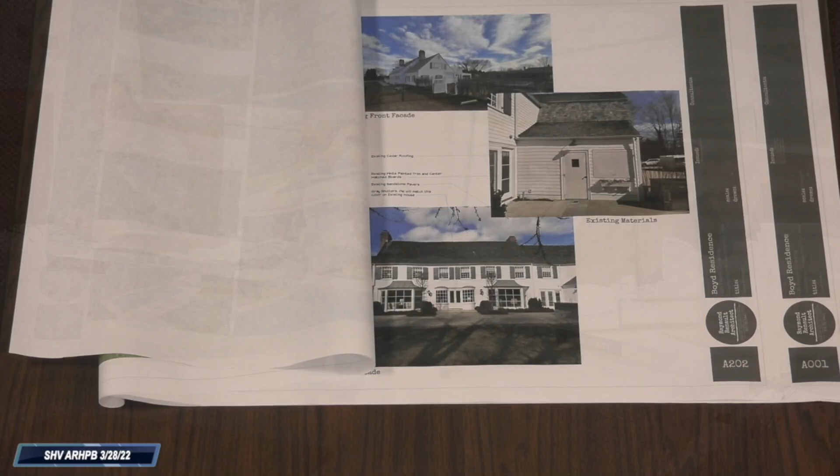We could simplify the Tuscan order so it's a little more understated. Well, this is like a colonial revival house, and it's relatively Spartan, which is nice. It's a beautiful house. But to have paired squared columns rather overwhelms it.

It's a large span. So when we looked at the example with just a single column on both corners, I can see that would look bad, too spindly. No, I think a paired column is probably the right way to do it, just the detailing is different. Okay, that's all I have to say.

All right, well, I appreciate you taking to heart the board's suggestions. So if you can get us new plans and renderings before our next meeting, we'll see you in a couple of weeks. I think it should be pretty good from there.

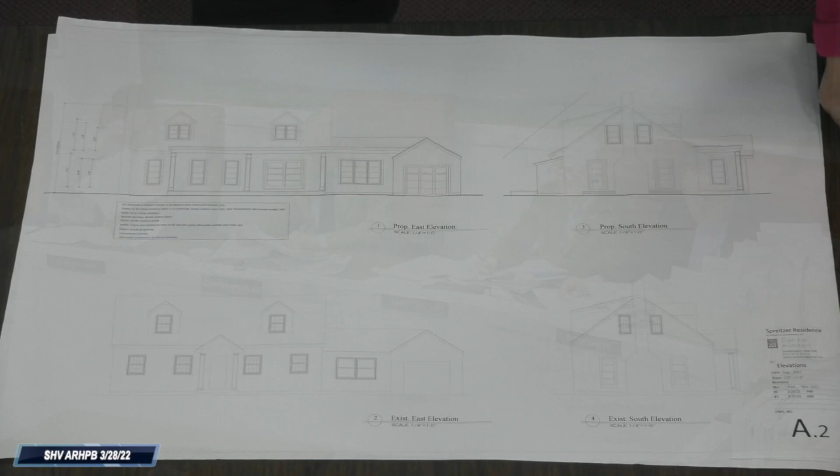As you'll see in the elevations, it will create a nice look. At the bottom, I'm sorry, is the existing condition. We have a portico that we're going to modify, creating this porch that will have a flat roof, but it will make a good balance with the existing conditions of the house. We're going to extend that and create that roof.

And also in the back, we're gonna create sliding doors for access to the pool. We're going to use cedar roof shingles, 5.5 exposed, might be gray. Just be careful of the microphone. I apologize, that's okay. And we're gonna have trees, greenery, maybe more on the higher part, and we're also gonna have natural wood for the corridor.

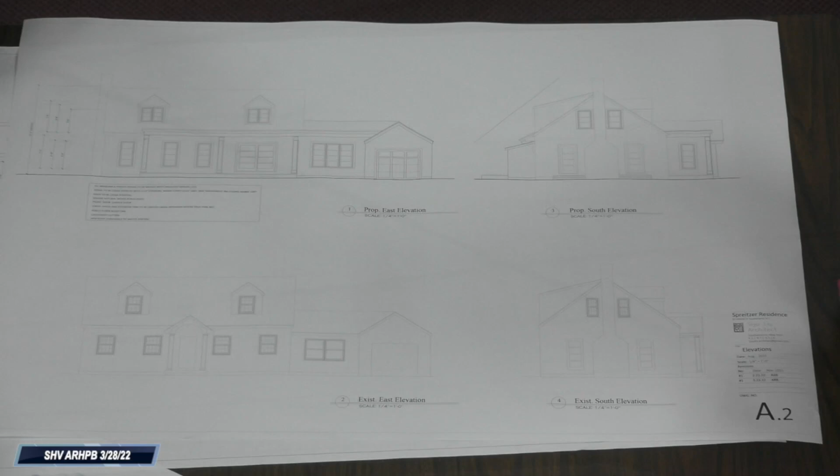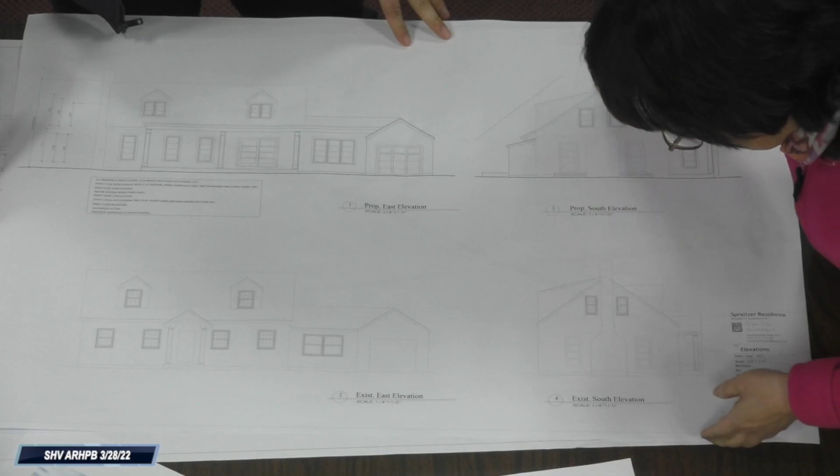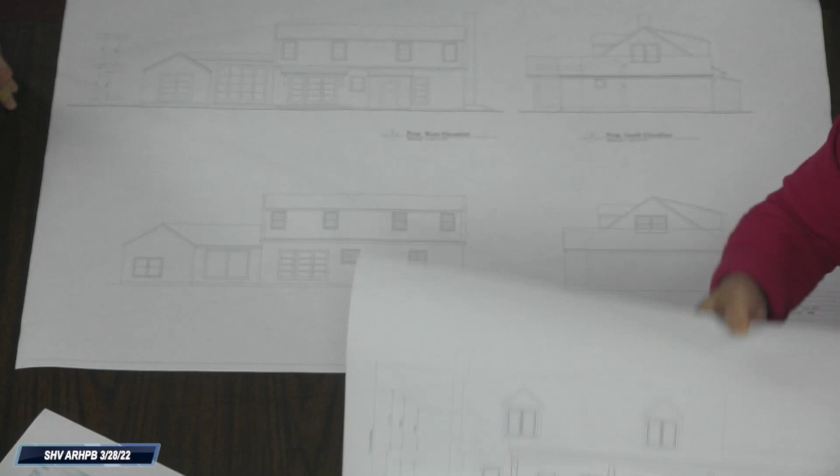Set back like 14 feet. Okay, it's a recess. The elevation looks flat, obviously, but it's set way back so the pool is completely recessed into the house. Yes, basically we'll point out that volume and create that for the pool. All right, that's good. No, good, I'm not a pool person, so, you know.

That's me, I would, yeah. Okay, comments?

Well, I like that you're unifying the windows in the house, but I think they're the wrong windows for the house. The core of the house seems very traditional, and those are casement windows. Are those metal windows you're proposing? They're not metal windows, they're Andersen A-Series, architectural series. I believe they're fiberglass.

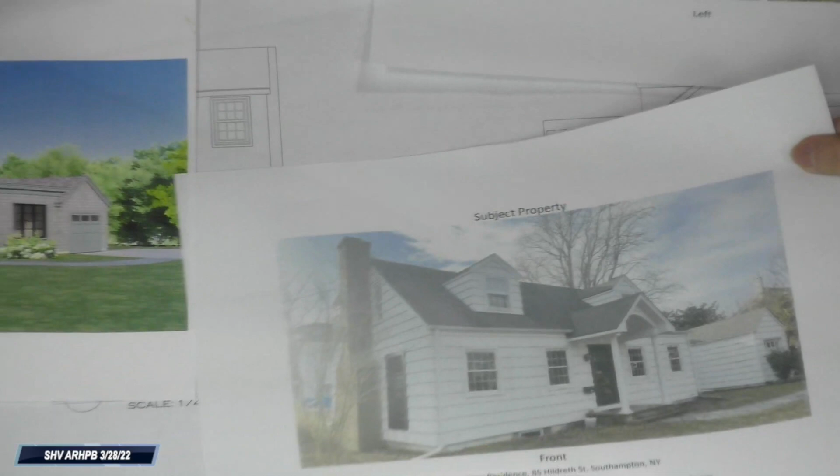We have pictures of the existing house. They have windows and doors already - the front door and the two side doors. It's called dark bronze window, Andersen A-Series, fiberglass windows, and they already have a building permit for it.

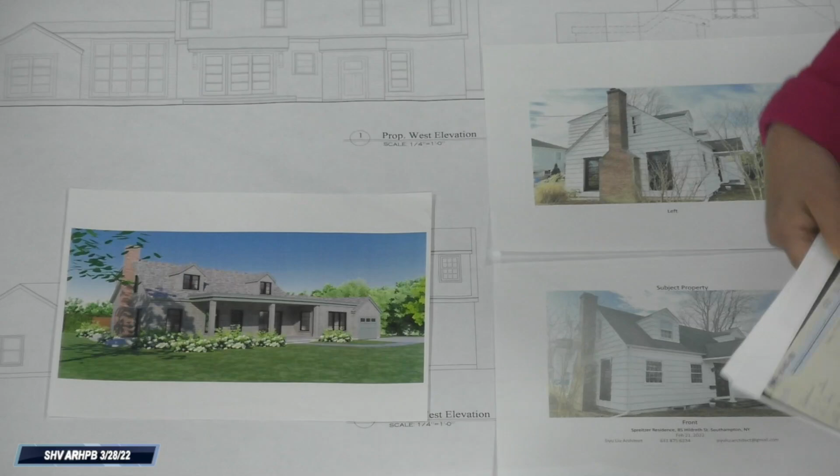I'm confused - are the windows already in? Yes, they have the permits. Well, that doesn't work that way, does it? No, they do have permit. It's before me, I started working for them in December, but they do have a permit from April 16th, 2021.

Right, but you're submitting a new design with fenestration on it, so we're approving what's presented here. That which exists or was approved before is to some extent not relevant, because you're submitting this.

To mirror John's comments, Hildreth is a street with subtle houses that have been there a long time, and even the newer houses are understated. This design has some good elements, but when you bring in contemporary windows with the black framework, you've popped this whole thing out, and it's right on the corner.

I think you're in the right direction, and I think that's what some of you are going for. But I think some of the treatments are making it less compatible, which is our jurisdiction. Yes, I understand - there is a little hardship difficulty because they don't have a lot of funds, so they were doing the renovation piecemeal.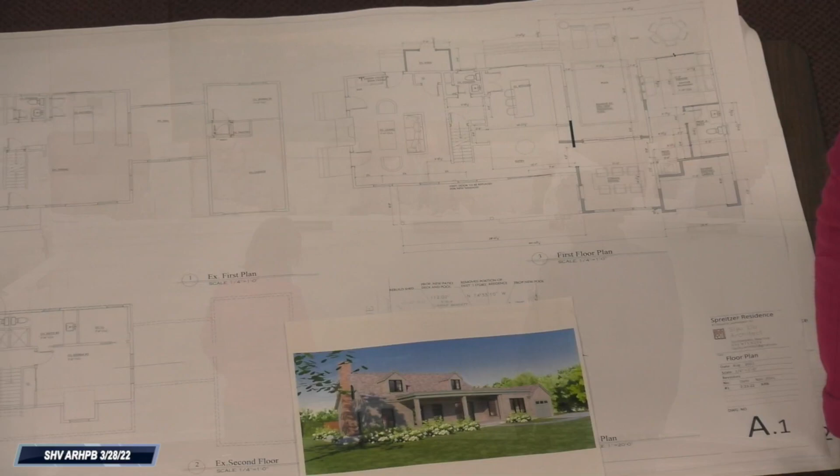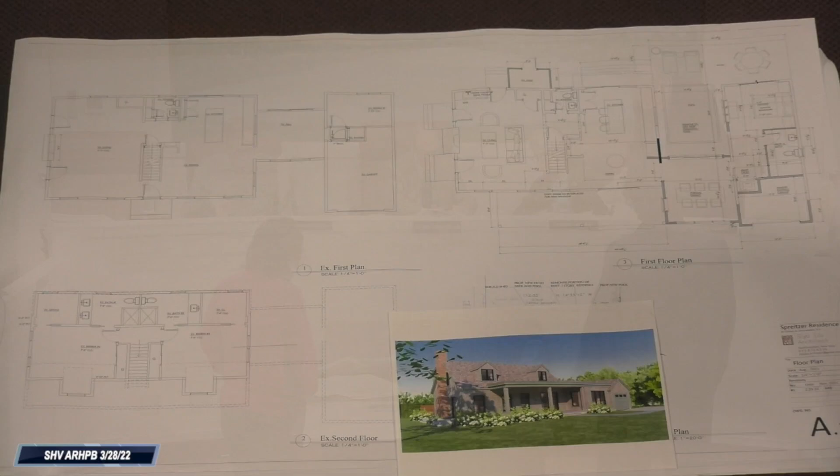So are the windows here or here? Those big windows, are they here or here? We're back here. Oh okay. So this is the shape of the house. Right, and they're recessed. Right. So right now the windows in the rear are back here. No, the breezeway is recessed as well. Oh, in the existing, okay. They're pretty deep inside, I think.

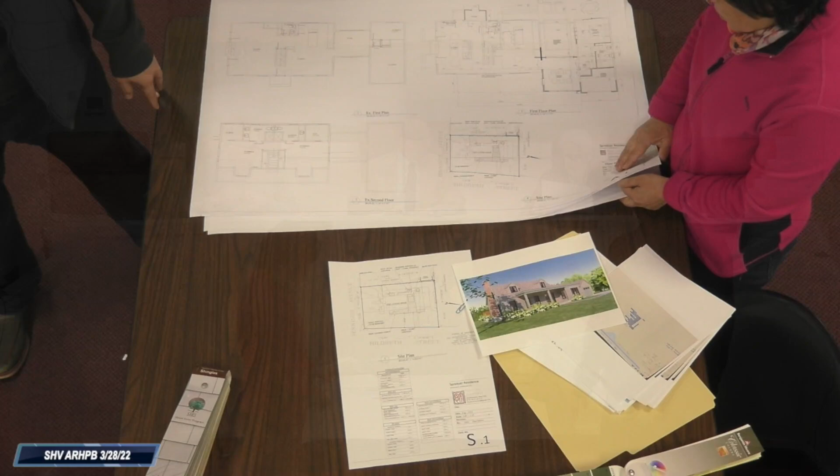If there's one less row, that would be acceptable to me. They're almost the same dimensions as the existing windows. Maybe. I think it'd be right if you didn't have that top row, three high instead of four panes high. Might look better. And it would still be larger than the existing, and it would match the house on the other side. Yeah, I agree, John.

Oh yeah, it would be closer to the dimension on the other side. Yeah, it would just go to the floor instead. So I think that would be better.

So I guess the front door, that recessed window, I think consensus here is maybe it should just be 3 panes high rather than 4, on the west elevation.

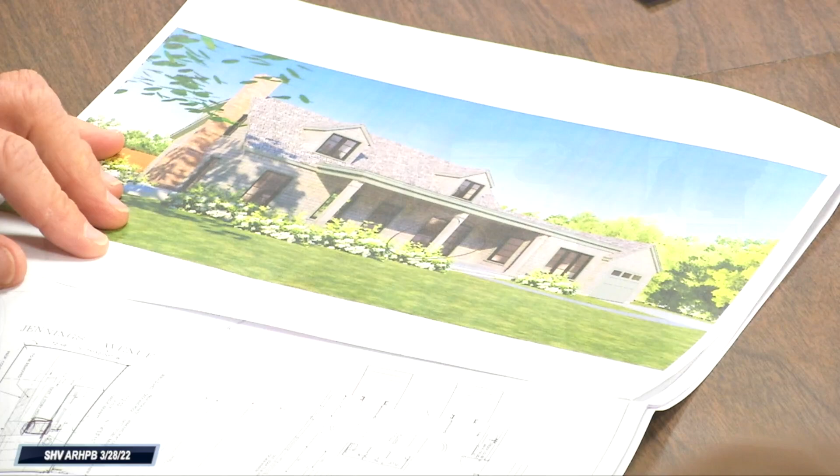Also, on this massive porch, there's a very awkward way that it doesn't resolve itself. It dead ends into the garage, or that's what appears to happen when you're looking at the elevation. So you're saying if it ended here and just sort of tapered off?

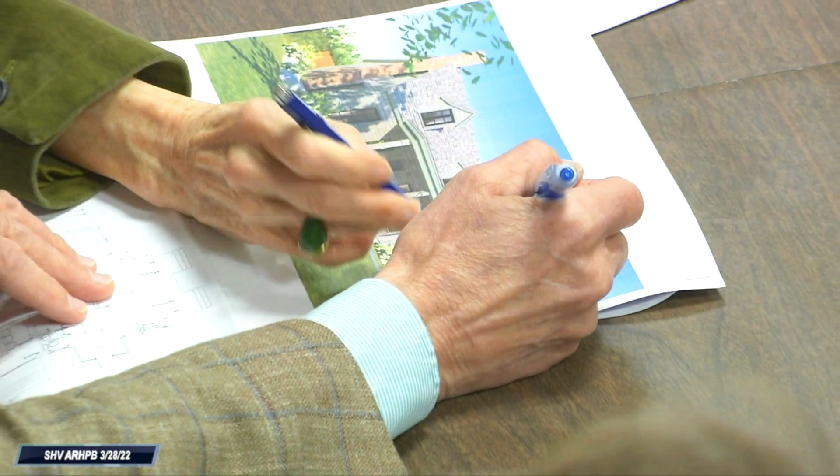Isn't that an odd thing? Yes, I don't know how you'd solve it. I think if it were just thinner, it won't be as obvious. If it was the same dimension as the eave board, at the bottom of the garage, that beefiness comes across and dead ends. If it were just a single, it will not be quite as pronounced.

Okay, so let's see if I can summarize. Looking at the front, there's an issue with the door, that the door is not compatible with doors in the neighborhood. The front porch is massive, in part because of the baluster.

Yeah, the entablature, the fascia. It's like a double fascia rather than a single, and a single fascia would be plenty. Or, if you wanted a double one, make it lower, below that one, not on top of it, which might actually help with the columns. The columns look kind of tall.

And then as far as looking at the front, the fenestration, the windows apparently are okay for the majority of the board, from what I can sense. However, the framing needs to be toned down in color.

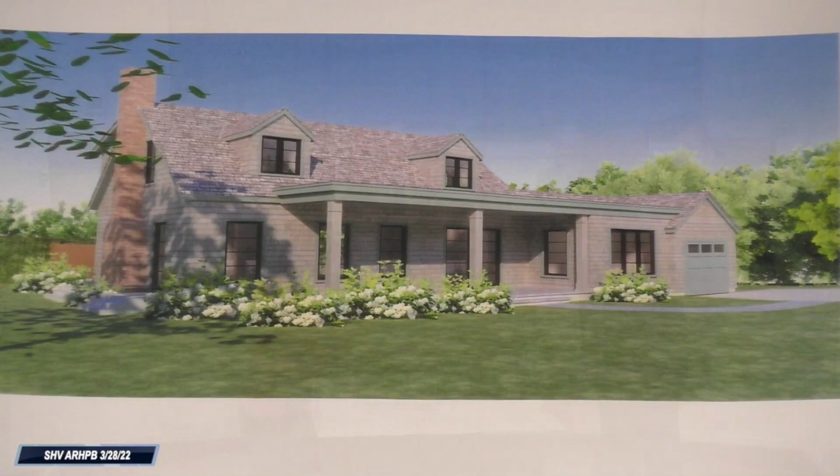And then as we go to the rear, the windows on the west elevation, instead of being 4 panes high, reduce them to 3 panes high. So just remove the top pane and fill that in. What else will be in, gentlemen?

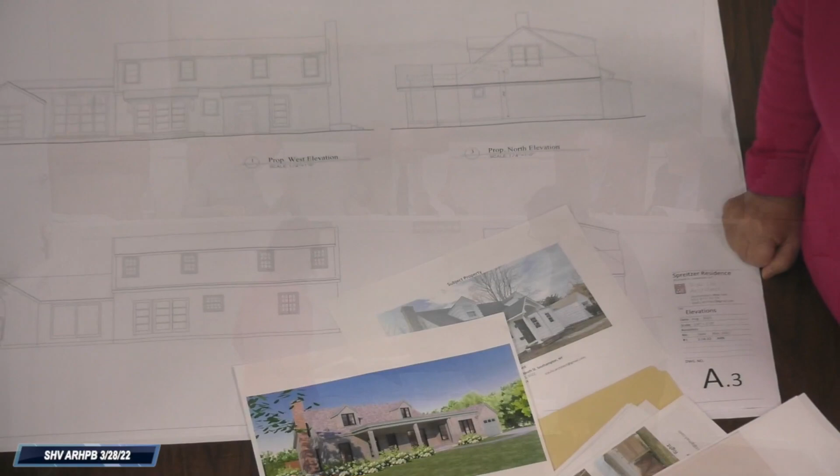Are those windows, those are not doors, correct? Those are windows, the 4 over 4. Good point. See the proposed east elevation, you have a series of tall, narrow windows, and then after you get past those, you have a triple set of windows.

It seems to me that once you resolved your problem with the front door sliding, it might be a better design if you were to take those 3, and maybe the 2 central ones, combine them into a paired window instead of a vertical one down the middle. Or just make the proportion of those single vertical windows facing east more like one of the 3 in the triple ganged window, or maybe even combine them as a double gang.

These are suggestions. The 3 in tandem seem very mingy - that's an architectural term. If you were to gang or pair these, it would add a little more architectural weight to them, and it would not be quite as 3 singles.

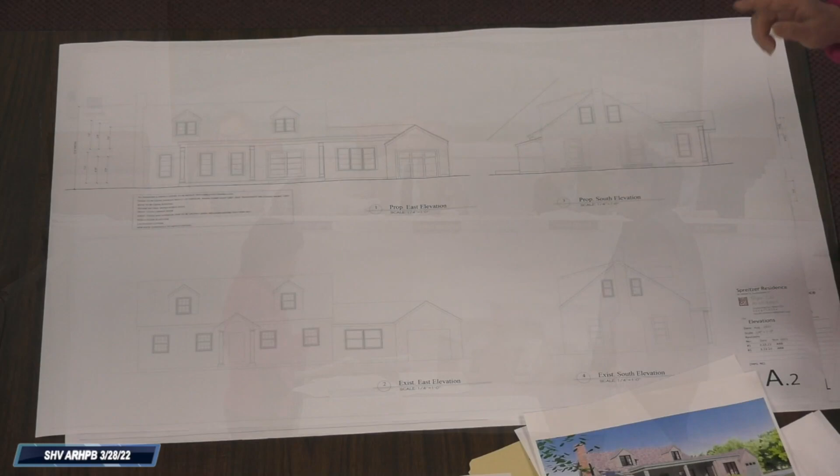So let me repeat myself to make sure I interpreted you correctly: lower the porch roof and maybe band it together, lower the sliding door by one row, and that's basically in terms of the front door.

Then the last thing is the color of the windows. Maybe they can paint them.

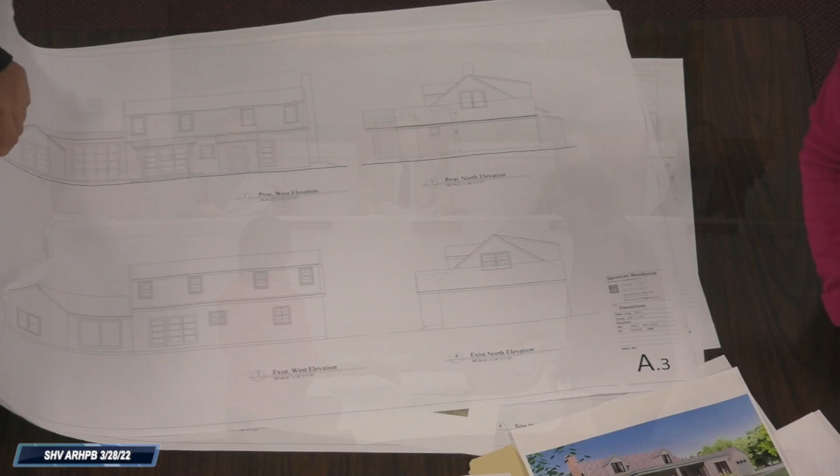My name is John Bennett.

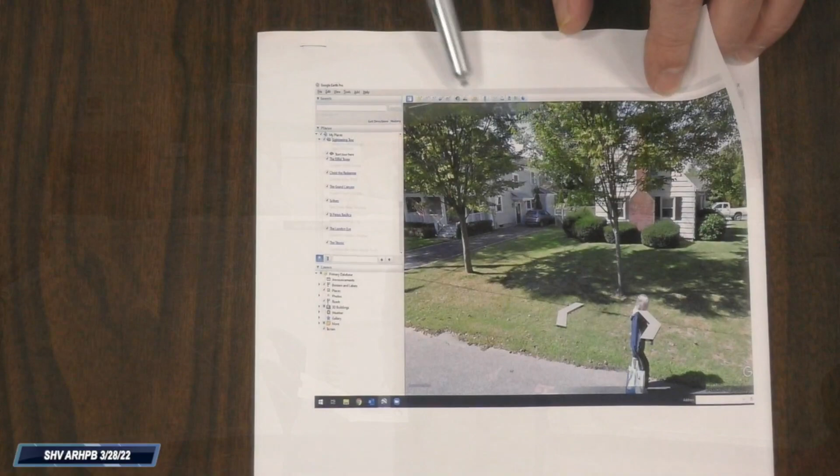I find absolutely no approvals for these large metal doors that now flank the chimney. Somebody may have had a building permit to do something, but we didn't see it, and we didn't see that it would be valid.

And then on the east elevation, now he's got this metal door in the front, and now he wants to just compound this horrible error. These windows should all be double hung windows like every other house, in terms of the neighborhood point of view.

Surrounding neighborhoods—I think Jeff characterized it well. They're homes that don't call attention to one another. They're traditional Southampton homes. It's evident why the pool is inset—I have so much to say about the pool and its legality, I'll get to that.

This is the house directly across the street, diagonally from Carol's house and my house. This is the old J. Foster Terry house, but you can see it's very typical. This is our house on 60 Hillbrook Street—again double hung windows, we were very particular. They're six-over-one, which you saw in that era because people started having a little money so they could put in one big pane. Very traditional—the front is clapboard and the rest is shingle, like a Nantucket or Sag Harbor house.

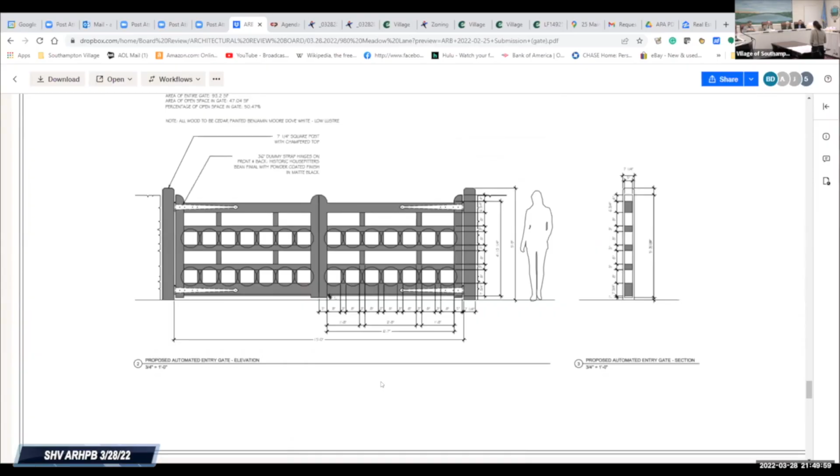So just one thing, lights? No lights. Okay, no. Automatic mechanism, yes, that will be located at an appropriately positioned place. So, what the board over the last year or so has been asking for is the mechanism not to be external, but either included in the column - basically no gooseneck, no external mechanism. I know some exist on there, but we're trying to move away from that. To the extent that the applicant can put the mechanism on the column, you'll get approved, you'll get a vote. Is that okay? Oh yeah, absolutely.

And how far back is the gate from the street? Is it 18 feet? Because that could be another solution - if you move it back further, the gooseneck wouldn't necessarily be an issue, depending on how. That's true, but there are two options there.

So if that's the case, no public comment, Kat? No, sir. So what I would do is I will move that we approve the application for 980 Meadow Lane Trust for driveway gates, with the note that there will be no external automated, no keypad, gooseneck. We'll note that on the application.

Well, actually, this is just a sample of the color. And I could write that in, Jackie. She doesn't have to write it in, right? Okay, I know what to do.

Okay, do I have a second on that? Second, by John. All in favor? Aye. Okay, great. Thank you so much for sticking around.